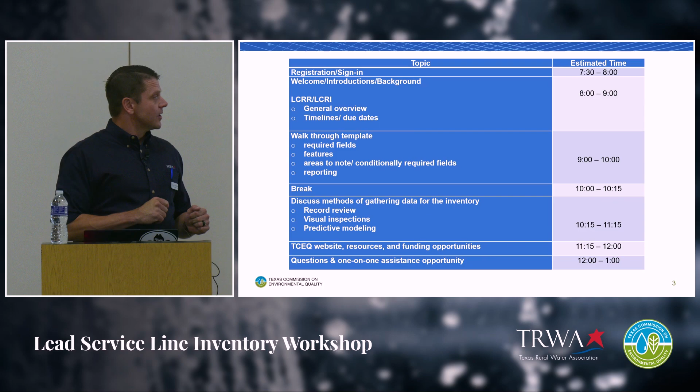Today this is a pretty loose agenda, but we should be going from about 8 to 12 o'clock. We're going to go over 4 sections: an overview of LCRR with a little bit of LCRI, the improvements. We're going to walk through the template, each section of that, to try to explain what is needed on each component or tab of that Excel sheet. We're going to go through the different methods of gathering this information, and then at the end we're going to go through some resources and funding information. We're going to be breaking this up for different speakers.

Without any further hesitation, we'll have Elston Johnson go over the LCRR overview.

Thank you, Jason. So I'm going to take some time to go through the actual overview of the rule requirements for the LCRR and mention a little bit of LCRI. We'll talk about that when we get to it - it hasn't been released yet. What we want to do is give a little background about the lead and copper rule revisions, talk about EPA's intent to strengthen the current lead and copper rule, and then go through an overview and the next steps.

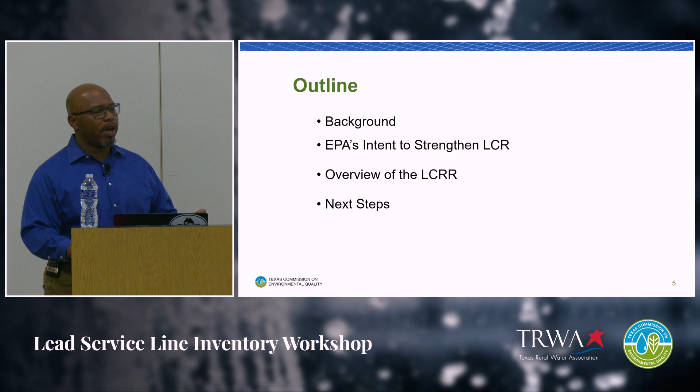All right, so the lead and copper rule. The lead and copper rule was originally published by EPA in 1991. And as we all know, health concerns with lead have been an issue for years. Human exposure to lead causes a number of health effects, most notably delayed development, mostly in infants and children, when it comes to mental capacity. There are also health effects that can impact adults as well, things like cardiovascular impacts.

Because of the number of routes of exposure, I know a lot of people are probably familiar with exposure through paint as well as dust, but water has a significant, drinking water especially, has a significant exposure rate. Some studies have put out that approximately 20% of exposure from lead has come from drinking water in adults, and it's even higher for infants and younger children.

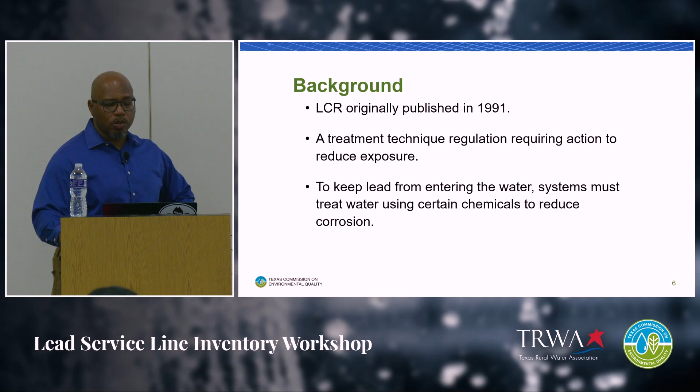So EPA put this rule out in 1991 to try to get those exposure rates down. It's a treatment technique-based regulation, meaning once you hit a level, and the LCRR is an action level, then there are activities you need to do to try to get that exposure down and get those levels of lead down. One of the most notable ways we do that currently, and still with the revision, is corrosion treatment, applying chemicals and treatment to slow down the rate of corrosion of lead out of pipes when it interacts with water.

To strengthen the LCR and the revisions, the goal is to proactively remove lead service lines and more equitably protect public health. The lead and copper rule revisions are effective now; they were put out in 2021. EPA is working on improvements and they're currently under development. My understanding is it'll be released maybe summer or fall, with changes to the current LCR to make it even more protective. So we'll wait and see what comes up with those.

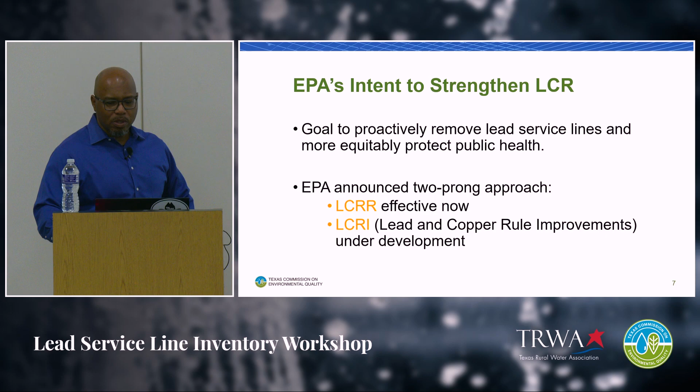So, to strengthen the LCR and better protect children and communities, there are three goals listed here for the rule. Number one is to get the lead out and effectively remove lead, which is the most effective way to address and prevent exposure to lead—literally get rid of it. Second is to empower communities, providing more information and education on how to reduce their lead exposure. And then, better protect children. This adds a component of testing for lead specifically in schools, which hadn't been in place in the current rule, other than if the school itself was a water system.

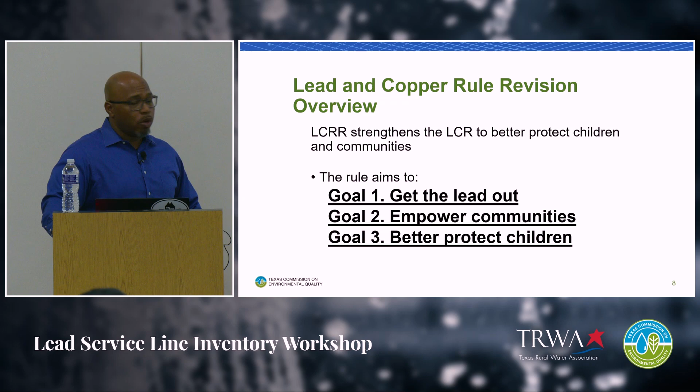So we'll walk through these goals. Goal one: replacing more lead service lines. The LCRR defines a lead service line as a portion of pipe made of lead which connects the water main to the building inlet. Basically, it's the line from the main to whatever structure is being served by the water system. It is typically owned by the water system on one side and the property owner on the other side, which makes things a little complicated, so we'll talk through that.

Also, galvanized service lines are considered a lead service line if they ever were, or currently are, downstream of a lead service line, or downstream of a line of unknown material. So if you don't know what the service line is made of, you have to assume right off the bat that it could possibly be lead and do more investigation. We'll talk through that more as we walk through the inventory specifically.

Now there's been a lot of discussion about the connectors, the goosenecks, the pigtails. They don't count as lead service lines in the final rule that was put out, but they are something to definitely pay attention to. As we walk through the inventory, you'll see that they need to be identified, and when found, they do need to be removed, but they do not count as a lead service line. Once they go through the specifics of the template and the inventory, they'll discuss that in more detail. Then a galvanized service line alone is not considered a lead service line either—as mentioned, it has to have been downstream of a lead service line or a line of unknown material.

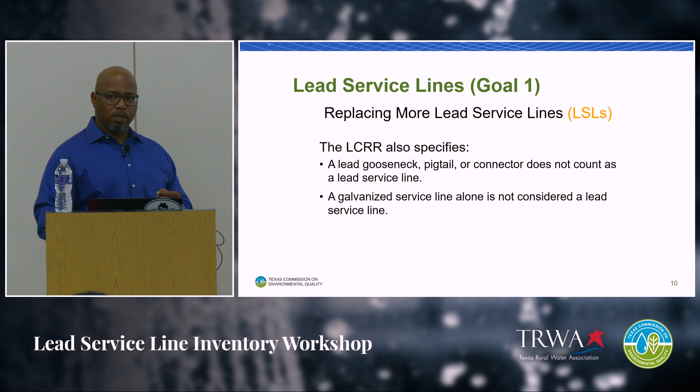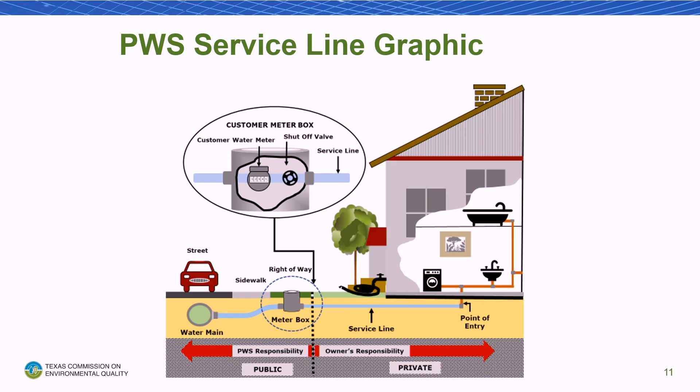Here's a graphic that describes a typical PWS service line. You see here that from the water main, you have up to the meter box, and then from the meter box at the property line, you go into the house, and that's what's considered the service line. Below, it shows what's considered PWS responsibility, the public side, and the owner's responsibility, the private side. Again, when it comes to getting that replaced, that can make things a little complicated.

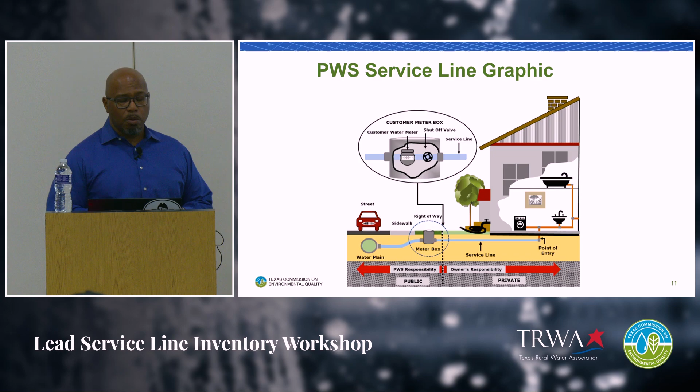Both parties have to work together to get that service line replaced when it is lead. This graphic highlights when there's a gooseneck in place, or a connector from the corporation stop off the water main to the service line and into the house. In this scenario, if that gooseneck is lead and the service line is PVC, this is not considered a lead service line, so that's why the green check mark is there.

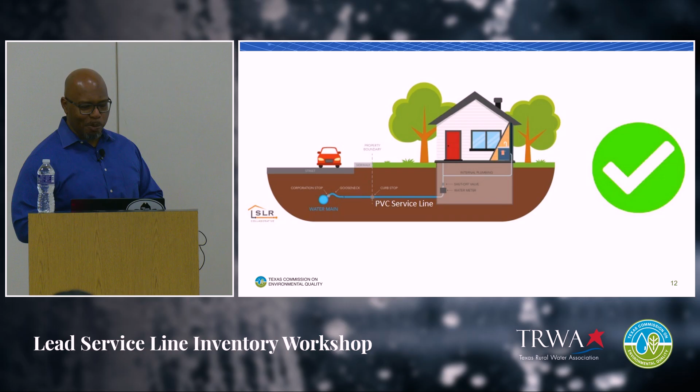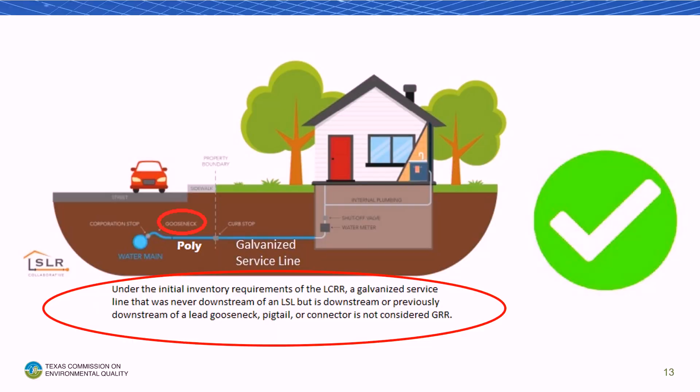Now in this scenario, with the gooseneck connection, if it happens to be lead, that line is listed as being a poly line from the connector to the meter box, to the curb stop, and then from there it's a galvanized service line. Remember, for a galvanized service line to be considered a lead service line that needs replacement, it needs to be downstream of a lead service line, not a gooseneck.

So we put this in here because there was a lot of talk about when the rule was being developed, and even after it came out, about how goosenecks, pigtails, and these lead connectors play into service lines and the replacement requirements. In this scenario, this would not be considered a lead service line.

In that scenario, does the pigtail have to be replaced because it's lead, or is it allowed to stay? My understanding, and correct me if I'm wrong, is if you identify a gooseneck that's lead, you should replace it, the connector itself, but not the service line.

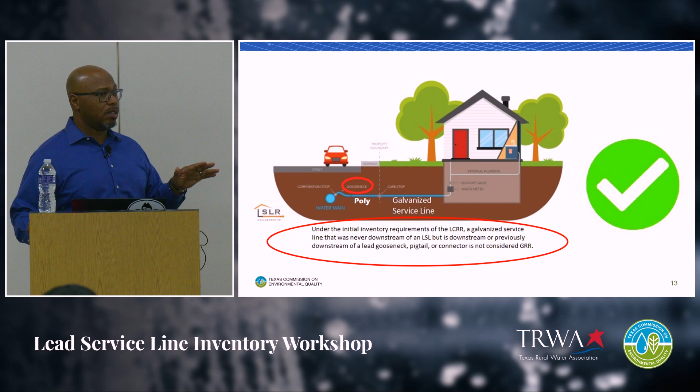Continuing on with goal 1, this is the federal rule citation of who needs to develop a lead service line inventory. It's all water systems, meaning all community water systems and non-transient, non-community water systems have to develop an inventory of their service lines.

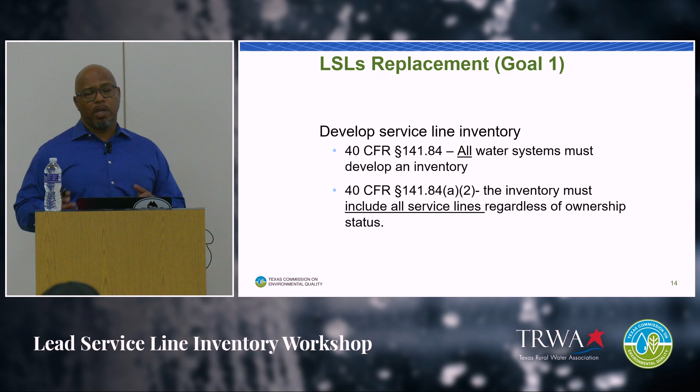The idea is to identify those that are lead that need replacement, and it includes service lines regardless of ownership status. As we saw in the graphic earlier, you have the public side and private side, the water system owned side and the homeowner owned side of the service line. Both need to be inventoried, and the template is set up to address that.

All community and non-transient, non-community water systems are required to develop the service line inventory, and there's a due date. Just in case you're not aware, I put it in red here: October 16, 2024. Your initial lead service inventory needs to be submitted by that date.

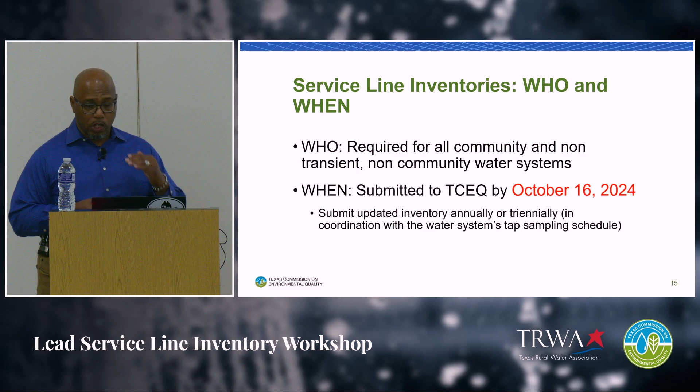After that, updates will be based on your current tap sampling schedule, either annual or triennial. You'll coordinate that with TCEQ, but that is when your service line inventory needs to be updated after the initial one on October 16th, 2024.

So the key is don't wait. As we go through today, there's a lot of information that needs to be evaluated in this initial inventory, a lot of records required to be evaluated to put this inventory together. The sooner you start, the better. It'll give you an opportunity to do a thorough review of your records, and if you need additional assistance, you'll have time to get it. So make sure you jump on this and get going if you haven't already.

Continuing on with goal 1, there are additional changes in the rule having to do with sampling. In the current rule, you sample based on a tier system, based on the structures and material of service lines in your service area. The rule made revisions to that, focusing more on tiers associated with identified lead service lines, so that those become your tap sample sites. This is the new tap sampling procedure.

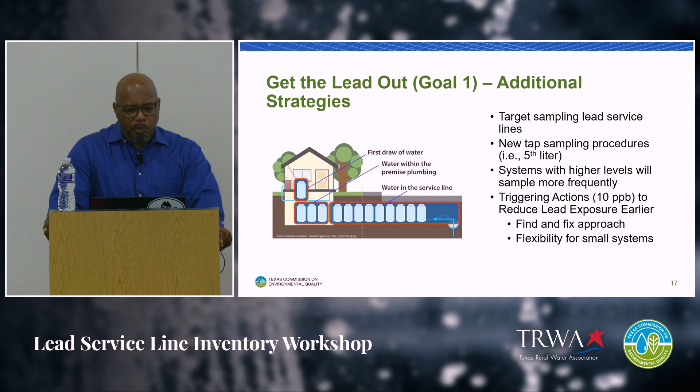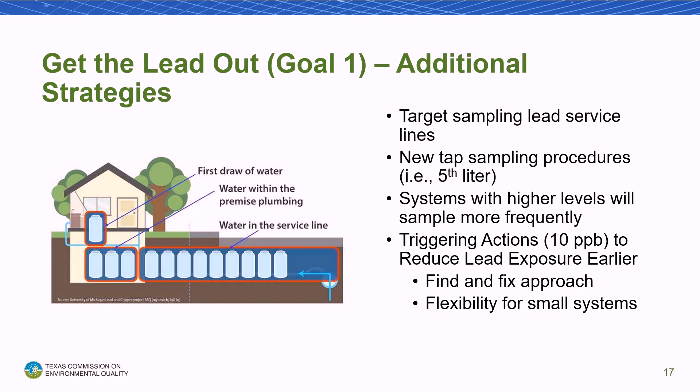As the graphic shows, instead of just doing the first draw, you now take the 5th liter draw. The first draw of water is taken and sampled for copper, then you draw 4 more, and that 5th one is sampled for lead. The idea is to get what's representative of the service line, not necessarily the interior plumbing of the house, because we want to see if the service line itself is providing the source of lead.

Systems with higher levels will sample more frequently, so the tap sampling schedule will be adjusted if you have action level exceedances for lead. Just like in the current rule, you'll have to sample more if you have lead hits in your tap samples. What's different is that now there's a triggering action level exceedance.

Before, we just had the action level exceedance, but now there's a trigger to start doing different assessments and other activities, at 10 parts per billion. The current action level is still 15 parts per billion, but this is now a trigger level at 10 parts, 5 parts below, to start doing additional assessment activities if you hit that trigger during tap sampling.

That's what you'll hear called the find-and-fix approach — going and doing additional sampling as an example of assessing that site, that tap, to see if there's any way to determine if there's lead from the service line or any other exposure point. There is some flexibility for small systems if they do hit that trigger.

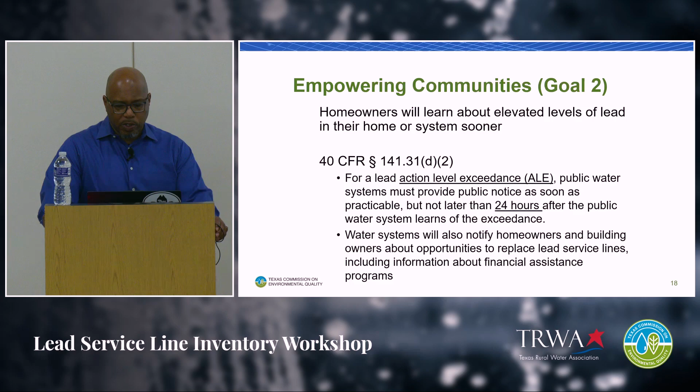Additional information also needs to go into your Consumer Confidence Report, or CCR. The mandatory health effects language listed in the rule, and information on your lead service line replacement program, needs to be in your CCR now.

If you have identified lead service lines in your inventory, those customers now need to be notified about those lead service lines on an annual basis. And if you have any inquiries about lead service lines once your inventory is made available to customers, you have to respond to those information requests as well.

If you have a population over 50,000, your lead service line inventory must be available online to your customers. Under 50,000, you provide it when requested.

You also have to deliver notice and public education material to your customers that lists out your lead service line. When you're doing any lead service line replacement work, or any work that could disturb that lead service line, you must notify those customers right away and provide additional public education about reducing their exposure to lead.

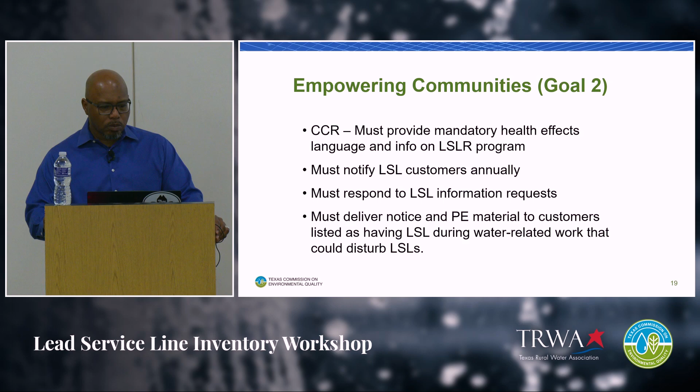Goal 3 is to better protect children. This is also something new with the LCRR: targeted sampling at schools and child care facilities. The idea behind it is that children are at the most risk of the health impacts of lead exposure, so we want to get more information by sampling and evaluating taps at the places where they spend the most time — schools and child care facilities.

The LCR defines, as you can see here, the child care facilities.

Those that are licensed by their state or local agency. Schools include not only just public schools, but private schools, charter schools.

Elementary and secondary students. Elementary school is defined specifically up to 8th grade because the requirement is to sample at child care facilities and elementary schools. This next slide talks about that.

The idea is that your community water systems have to sample 20% of their licensed child care facilities as well as the elementary schools. That is going to the schools, helping them identify taps, or not taps, but faucets where there's human consumption of water and where there's opportunity for exposure of the students to lead, water containing lead.

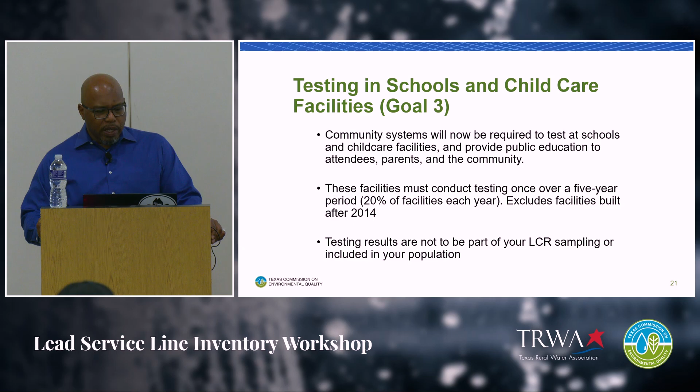So with that, there is currently an opportunity to utilize funds for your schools in your systems to do voluntary program testing right now. This program actually provides grant money and technical assistance to help your schools identify those areas that they need to sample, put together a sampling plan, even a plan for replacement if necessary. They'll do the sampling, pay for the analysis, and provide your schools technical assistance to get the sampling done.

You should direct your schools to this, because this is an opportunity to get a jump start on the testing requirement for your schools and have them get not only funding help but technical assistance. My understanding is a number of schools in the state have already taken advantage of this, and the program is continuing, so you might as well look into it, and it'll help you get a jump on the requirement for testing your schools in your service area.

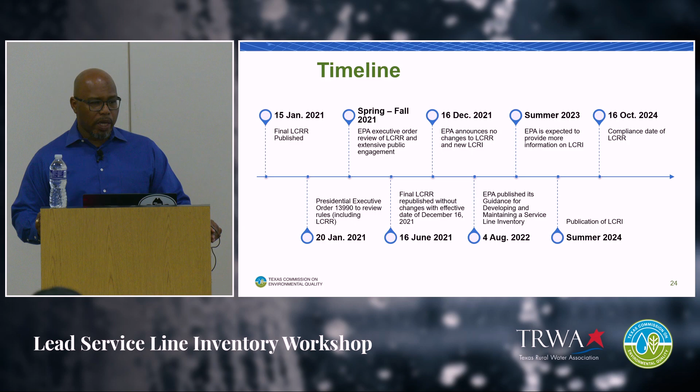So what do we do now? As I mentioned earlier, continue to comply with your current LCR rules, read the revisions that are out there online, and EPA has put out guidance. You have the lead service line inventory guidance from EPA, and start working on the inventory. Be proactive as you can. Get ahead of getting the lead service line replacement done, getting a program in place. There's a lot of funding available. We're going to hear about that a little bit later today, and take advantage of all these things, and also continue with corrosion control, evaluate if you need to do corrosion control in your system. The whole idea behind this, again, is to just lessen the exposure to lead and ultimately replace and completely reduce that exposure to your customers.

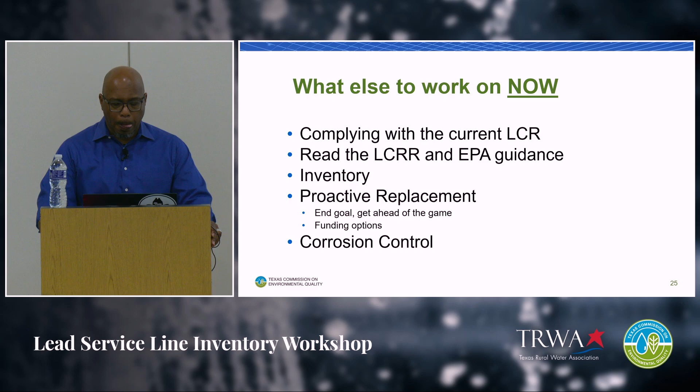So with that, are there any questions on the lead and copper rule revisions specifically?

Good morning, Nelson. Hector Alanis from Bluff Municipal Utility District here in Round Rock. Regarding CCR, the mandatory language, will there be some language that is mandated for that CCR, and when should it start?

Okay, so the question is, is there mandated language for the CCR, and will that be put out? I'm going to start, but I'll probably defer this question to make sure I get it right. The mandatory language is listed in the current rule, but I don't know if TCEQ is going to put out a template. Okay, normally TCEQ puts out a template, and that language will be in that template CCR, so you can incorporate it into what you put together for your CCR.